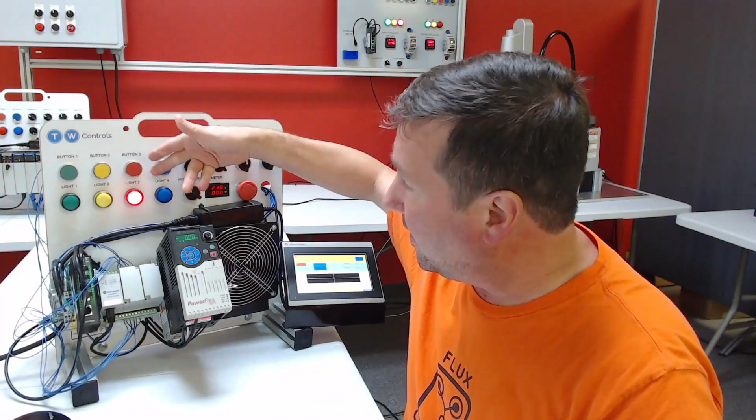Just to add a little bit of variability, pressing the red button won't make it go to the next step, but we need to press and hold it for 1 second, and then the blue light will come on. And finally, pressing the blue button will start the process all over. While this is a really simple thing we're doing here, this can easily be scaled to any machine.

And the best part about the methods we're showing here is they are compatible with all Allen Bradley PLCs. From the ControlLogix and CompactLogix for Studio 5000, formerly RSLogix 5000, to RSLogix 500 for the MicroLogix and the SLC 500, and even the Connected Components Workbench for the Micro800 PLC. Actually, these are probably compatible with most brands of PLCs because they use basic programming fundamentals.

Now, I'm not a fan of all these methods, but you will run into them out in the field. And I debated what order to put these in, and I decided to put them from the one I'm most likely to do to the one I am the least likely to do. And that doesn't mean the ones on the tail end are necessarily the worst. They're just the ones, in my opinion, that I wouldn't use to program.

In this lesson, we're going to show how to use a counter to track your machine steps. And this is actually the method I used in my very first program, which we reviewed not too long ago. Also note that this footage was extracted from a live stream, so it is not perfect.

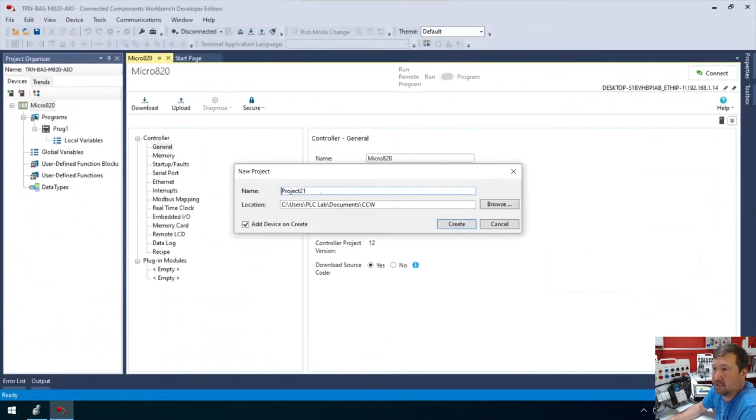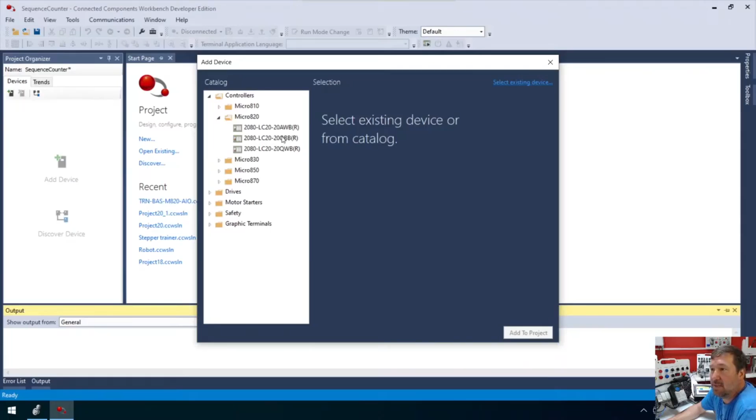And we're going to create a new program. And let's go back to our Studio 5000, and our first one is a counter type. So this is the program we're going to be making. And so I am going to just call this one Sequence Counter. And if we go to Controllers, and in this case we have a Micro820, and it's a 2080-LC20-20QBB, and we're going to select it and add to project.

So in our program, the first thing that we desperately need to always remember to do is to set up that Ethernet configuration. And if you're using one of our standard trainers, then it's going to be 192.168.1.10 with a subnet of 255.255.255.0. Now in the case of mine, since I have that one back there set up, the CompactLogix for 10, mine I'm going to set it at 14.

And then we're going to create a program. So we're going to add a new ladder diagram. And actually we're going to create two programs because we should segment ours a little bit, because that's something we definitely noticed in my first program, is that I had 300 rungs in one single routine.

So I am going to rename this one to Outputs, and I'm going to rename this one to Sequence. Now this is something that is different between Studio 5000 and the Connected Components Workbench. In this case, all programs are executed in the order that they're listed. So let's say we wanted Sequence to execute first, then we would just drag it up here. And now it's going to execute Sequence, and then it's going to execute Outputs, and then it's going to start over.

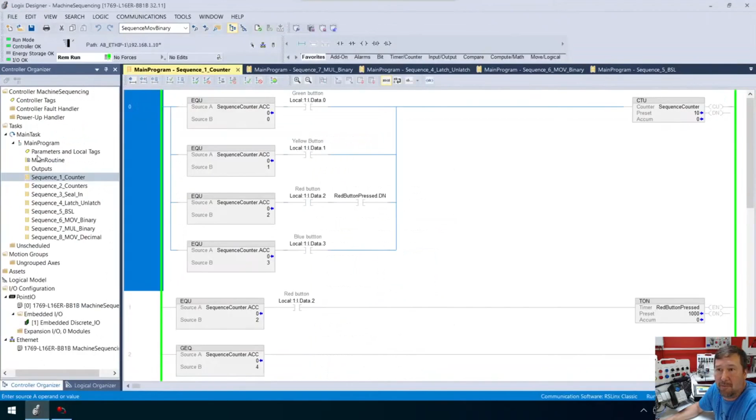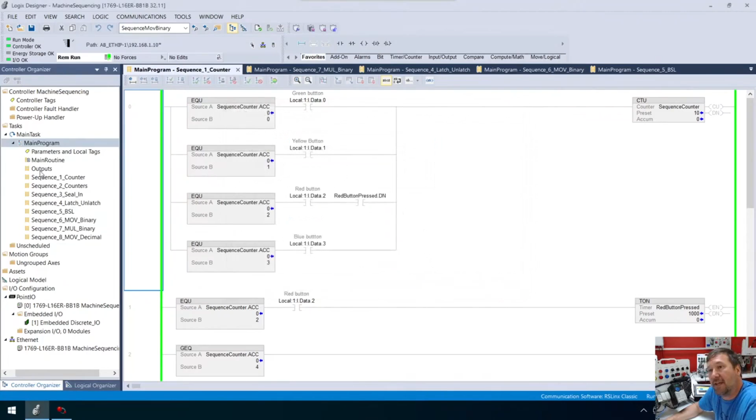Whereas in Studio 5000, we have a main routine. And if we right-click our main program and go to Properties, we can see our main routine is the main routine. So it only executes this routine right here, and then we can use the JSRs or other means to go to the other ones.

So in this case, I've done something that really you should not typically do, but I did this so that if we needed these samples, we could run them quickly. Here's my outputs, and then I have the different methods of sequencing where we can just switch them on and off as needed. But in this case, they are actually all executed.

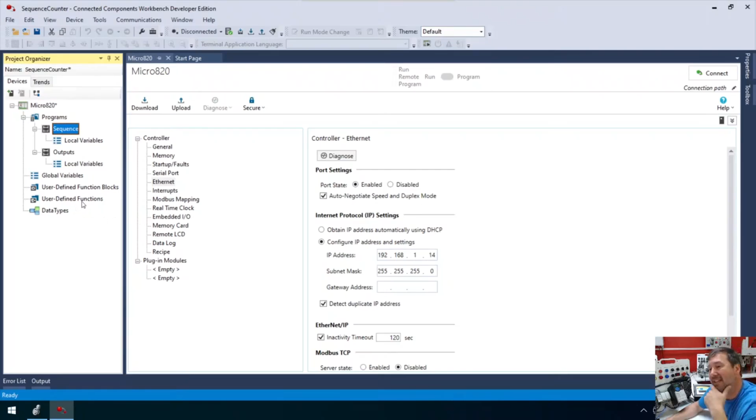And if we wanted subroutines, we'd actually use user-defined functions. And I guess I could do it that way, but no, let's stick fairly basic here. So in this case, we're going to be using a counter to run our sequencers. So we're going to open that up.

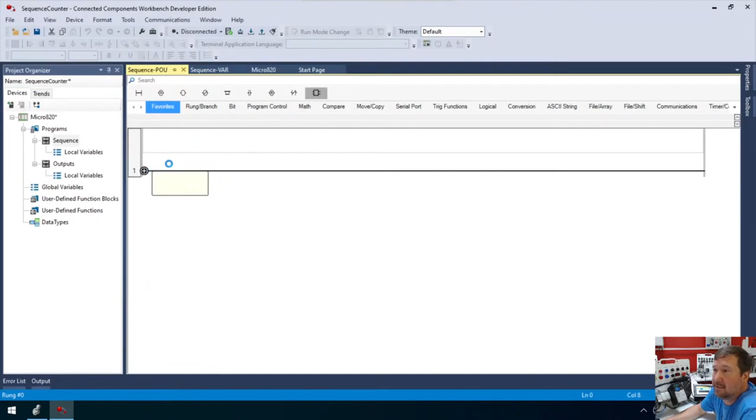Okay, and in this case, we're going to use just a really basic counter. So first I'm going to drag down an instruction block. And then if we just start typing CT, you're going to see the counters that come up. You have a count up counter, a count down counter, and then we have the up down counter. And we're going to use the CTU up counter. Let's leave this exactly as it is.

And then we're going to need some conditions to make it count. So I'm going to bring down a rung. And our first condition was that button 1 would make it index if it was in step 1, or in this case step 0. So we're going to go to our IO tab. I wish somebody explained to me why the outputs come before the inputs, but I almost always do that. And actually it's input 4. So input 4 is connected to button 1.

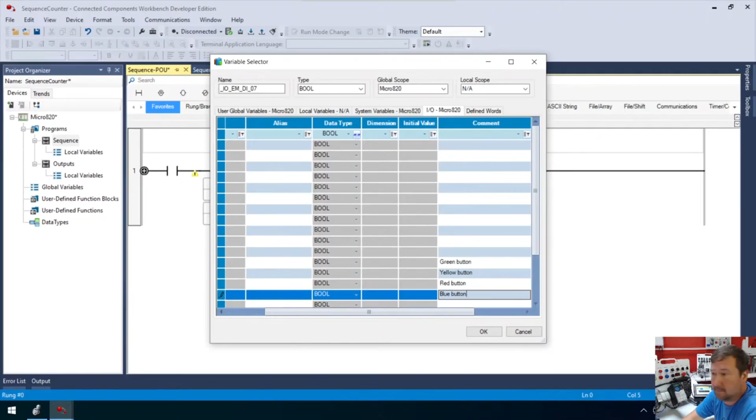In fact, let's go ahead and label these while we're here. So this is our green button. This is our yellow button. Red button, and finally our blue button. Okay, so we're going to use the green button here.

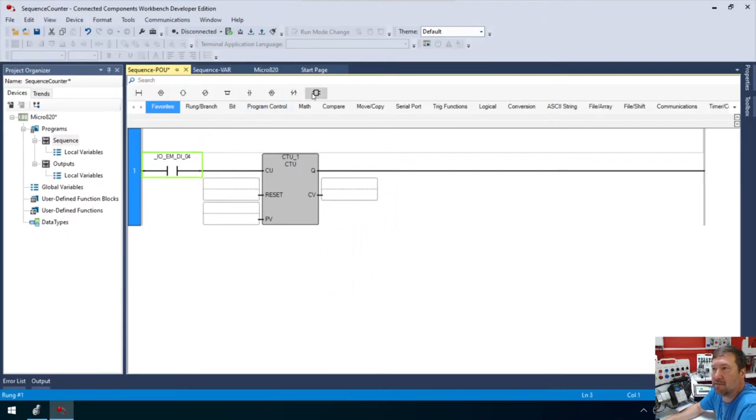Now one thing we've got to think about is what is the first step of a counter. Counters do start at step or accumulated value of 0. So we will have a step 0. There's nothing wrong with that. But we only want this button to work when we're in step 0. So we're going to bring another instruction block down in front of it. And we're going to be looking for an equal statement.

Now, we've talked about it in a few videos, because if you're in Studio 5000, you're going to want to type EQU and you're going to get nothing. And that's because right now I am in the default theme, we'll look in a second. But mainly, in this case, we've got to hunt and find the equal sign. Or I guess, can you hit equals? Yeah, we could hit the equals symbol and it would bring these up.

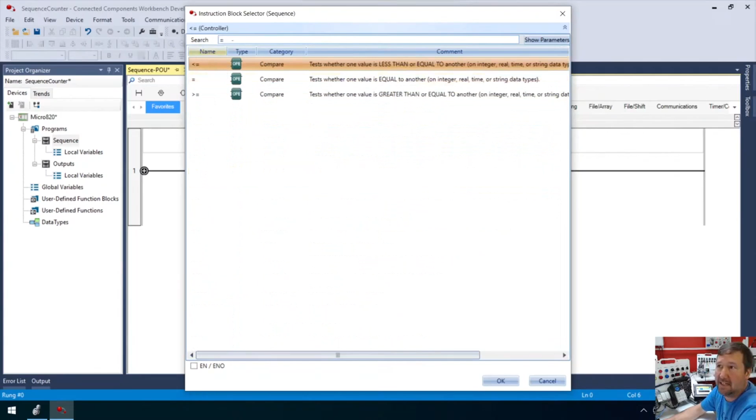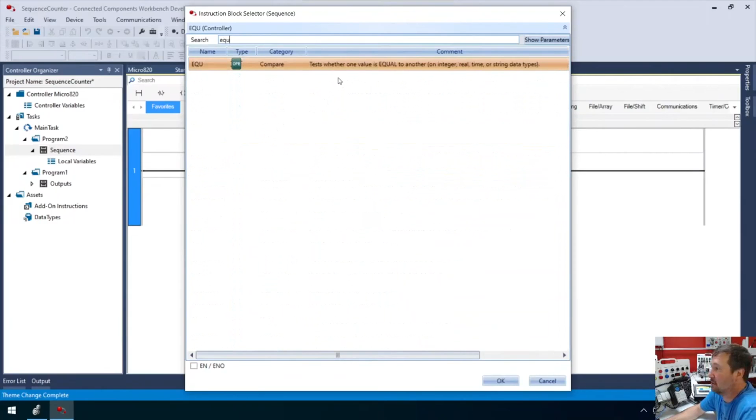Now, if you're more used to Studio 5000, the default theme up here, we're going to switch to the Logix theme. And then we'll go back in. And now if we double click on this, we can type EQU, which is what we're used to seeing in Studio 5000. And we can bring that in. All right, so now, what do we need to put here?

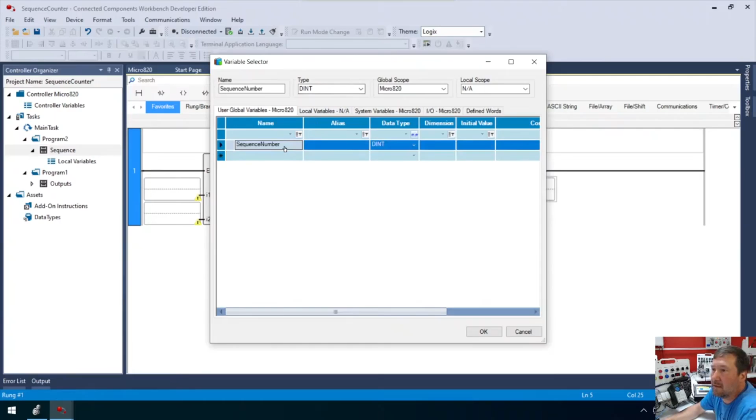Well, this is one of the differences in Connected Components Workbench: we don't really have a .ACC per se. We assign it things. So right here, I'm going to make this sequence number. So I'm going to double click here. And we're going to create a global variable called sequence. Let's see, am I going to create a new program each time? Yeah, we will. So we're just going to call this sequence number. And it will be a DINT. And so this is now going to be the accumulated value of this counter.

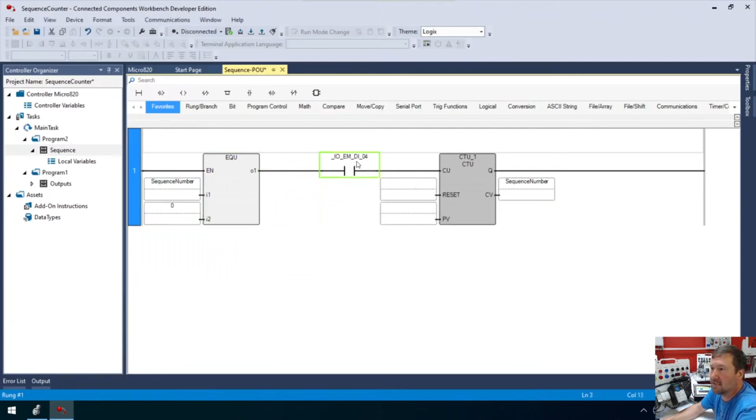So what I'm going to do now is I'm going to copy that. Let me right click that and copy. That way you can see what I did. And we're going to paste it right here. And I want to say if the sequence number is 0. And why is that not showing up as green button? Oh, it did. No, here.

So this is a little bit different. In Connected Components Workbench, I really don't know what comments exactly are for, because aliases are more of your comments or descriptions. There we go. Now we have a green button. So let me go back and take these out.

And move these over here. Yeah. Well, Rod, what were you so slow on that for? You're right. I usually do too. I just, when I was sitting here talking, I sat there and put them in the comment column.

All right, and while we're here, these are our lights. So this will be light 1. What's cool is in an alias situation, you can have spaces or anything in Connected Components. So they really do work just like, well, actually they're a good mix. Let me put these in. Light 2, light 3, light 4. All right, and mainly here we want the green button.

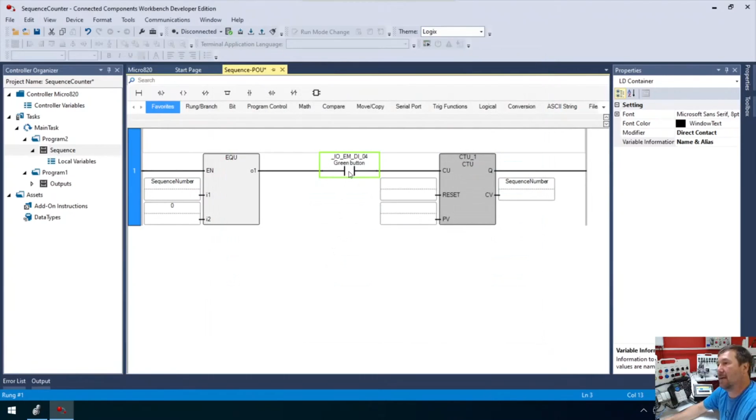What's cool about this is, let's just copy and paste that real quick, is I can type in _IO and I could go through all that and find that. But in this case, I can type yellow light. Yellow button. And there it is. So the alias is, in this case, it is kind of an alias because you can type them in, whereas descriptions in Studio 5000, you can't.

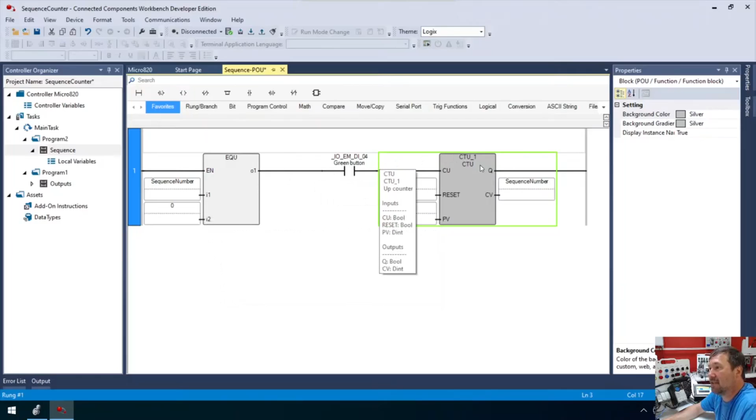So in this case, if our sequence number is 0 and we press the green button, then we're going to count up our counter. So that takes care of getting us through the first step. And now we're going to put a branch in the right place. And then we're going to copy, oh, that's right. Drag that there, drag this there. And then we're going to copy this equals down here. And actually we can just copy this green button down here as well.

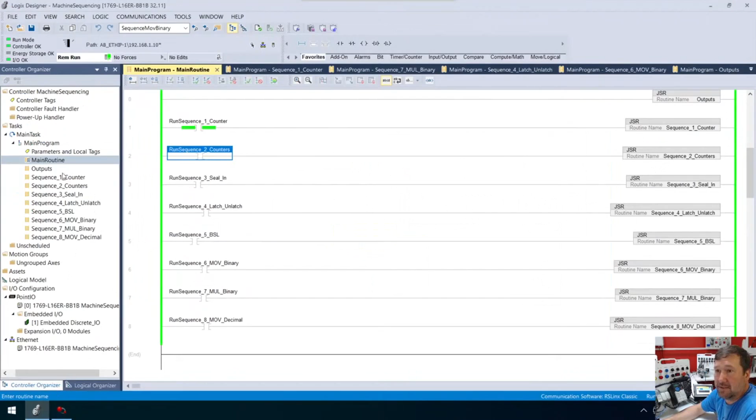Drag it over. And in this case, now if we're in sequence number 1 and we press the yellow button, then we want it to count. Because that's what I said, right? Let's go back to our Studio 5000. Let me make sure, yeah, counter, yellow button. Okay, now in this case, the red button, we want to have to hold it for 1 second before it goes on. I just thought it would be nice to add a little something to it.

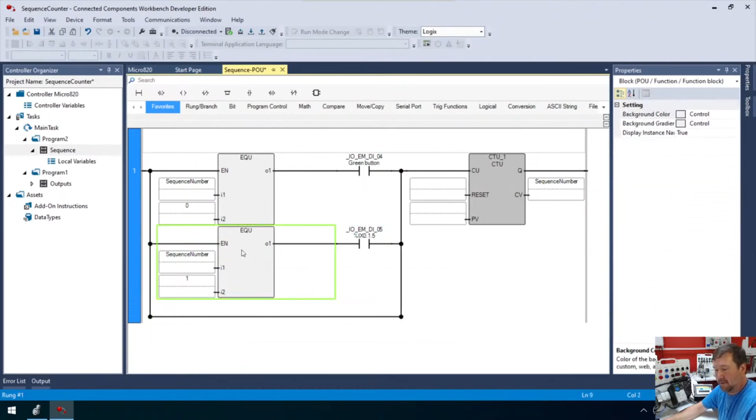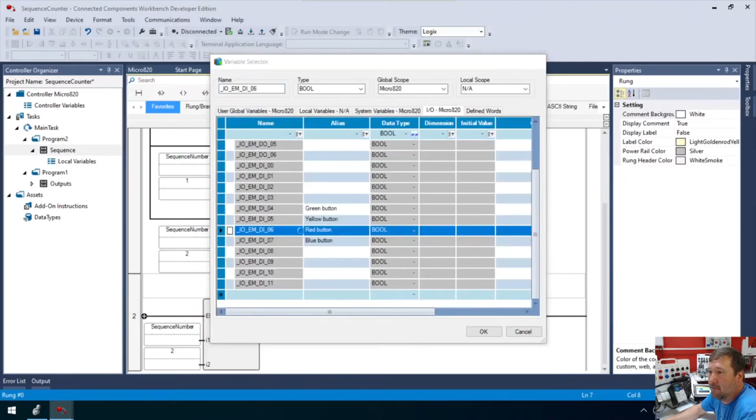So we're going to add another branch. And then we'll copy the equals. So in this case, though, we want a timer here. Now, in this case, I would probably put it on an additional rung. So if our sequence equals 2, and we have the red button, and now we want a timer. So we are just going to use a TON. Now if you're in the Logix theme, you can type TON.

And this is kind of one of the cool things about Connected Components Workbench, the way they use timers. One, I could put a variable in here, or I can simply put T#1S, and that's going to be a 1 second timer. I could also put in T#1000MS, and that would be the exact same 1 second timer. So I really do like the way they do the timers. And then up here, we're going to look for the Q bit in this case. The Q bit is very similar to the done bit.

So TON, Q bit. Now here's something I see done often, I was waiting for the right spot. First, I can add a description to this. So I could make this a little more descriptive, because right now, what is TON_1.Q? It's not really clear. A lot of people don't know it defaults to these names, but you can change them. So if I double click right here, right there is the instance name. So I can put red button delay.

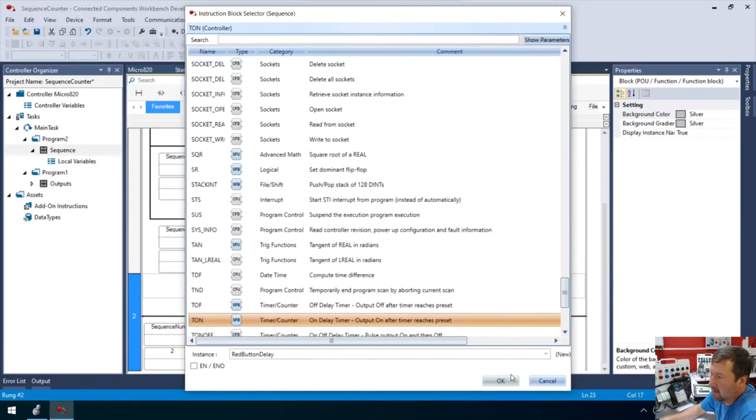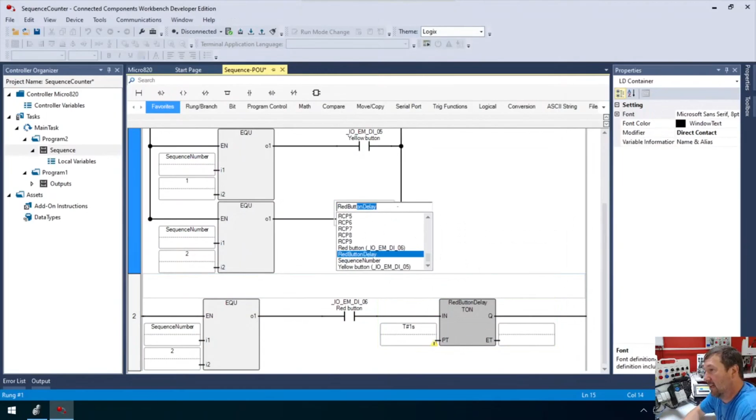Okay. And one thing I don't like is it doesn't automatically change it here. Now we've got to go and type red button delay. Oops, didn't get it right. Red button delay .Q. Where am I? Why do I have a triangle here? Does anybody know? What am I missing? T#1S. That sure looks right. Let me just hit the build button on this. What is that? Maybe I'm missing something.

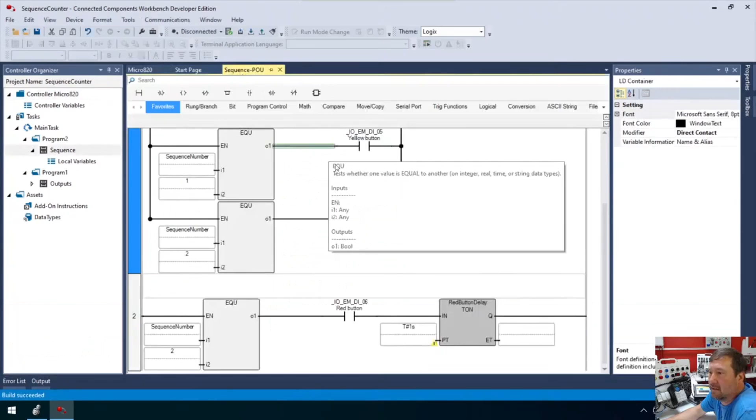Oh no, everything's fine. I'm not sure why it's showing a triangle here. Referring to undefined variable. Well, no. Yeah, it is an undefined variable because we just wrote that out. So, okay, maybe they'll come back to haunt us.

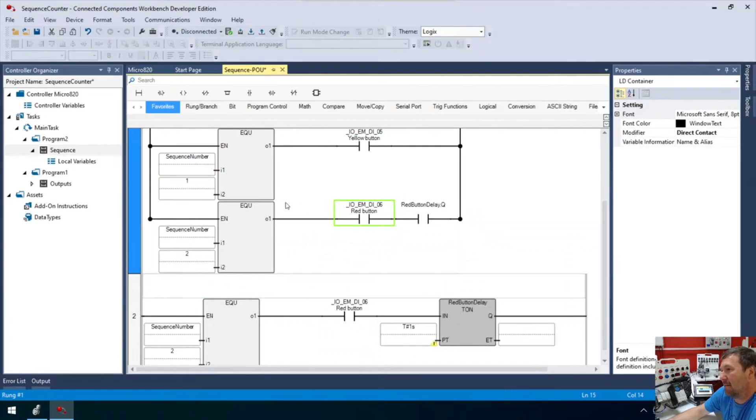I'm not sure. Now, here's one thing I would do here is, while this will work functionally fine, I actually probably would add this red button right here. Just for clarity. I don't know. I could go either way on that. This does nothing, has zero functionality because obviously the red button needs to be true for this timer to start. But if I was looking at it troubleshooting and I'm looking for an input, it might make it a little clearer that the red button's what I'm waiting on instead of having to chase this down. But okay, so that takes care of that one.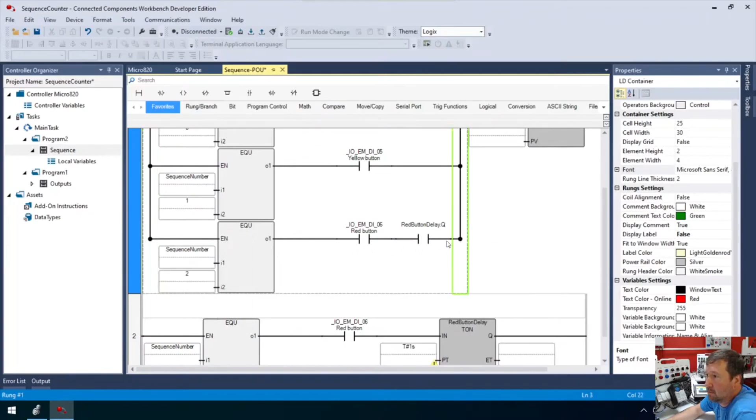And then finally, we're going to have a blue one. So we're going to add another branch. Oops, come on now. Why can I not? There we go. Below. And we're going to copy the equals one more time. And this time we're going to be looking for 3. And actually, yeah, we are going to do it this way. And this time we'll look for the blue button. All right, so that takes care of that.

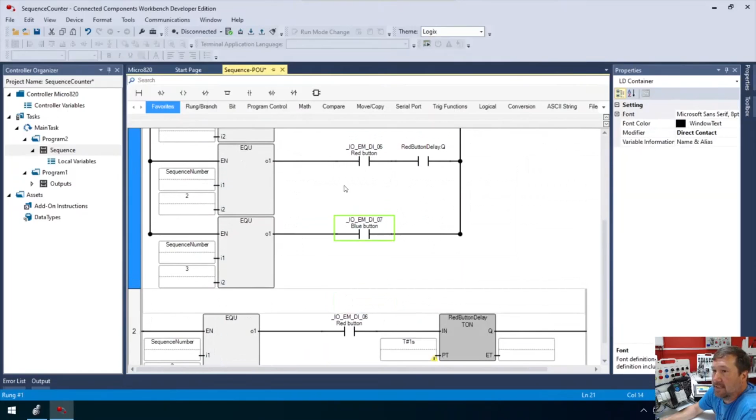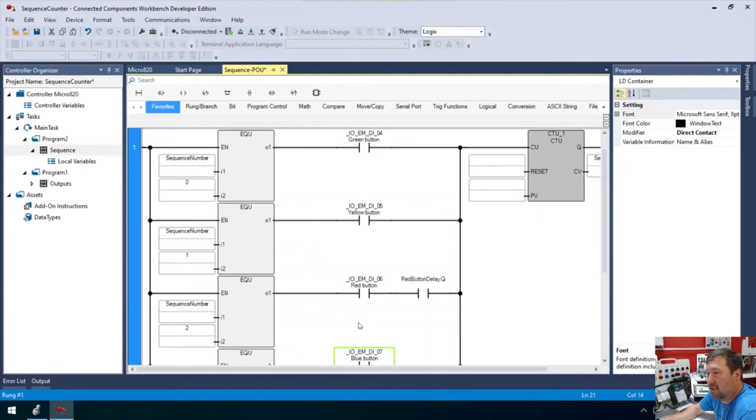And now what we need to do, so that is going to index through these. In fact, yeah, let's go ahead and finish our outputs and then talk about how this works. So basically, if we're in sequence 0, I want the green light to be on. 1, I want the yellow light to be on. 2, I want the red light to be on. I think I got one of those off. Green, yellow, red, and blue. So those are what we'll want. So I'm going to go down here to this output one.

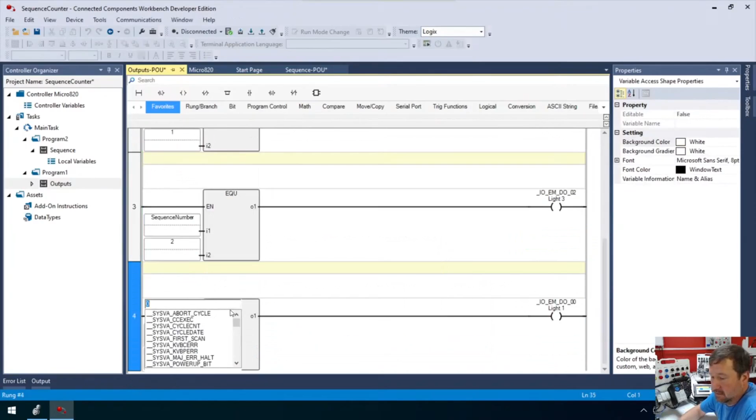And if the sequence number equals 0, we're going to output light number 1. All right, we should be able to just copy and paste that. And so in this case, if it's number 1, then we're going to go to light 2. And if we go to number 2, light 3, and finally 3, light number 4. Okay, now this is partially going to work, but let's go ahead and download this and talk about exactly what's going on here.

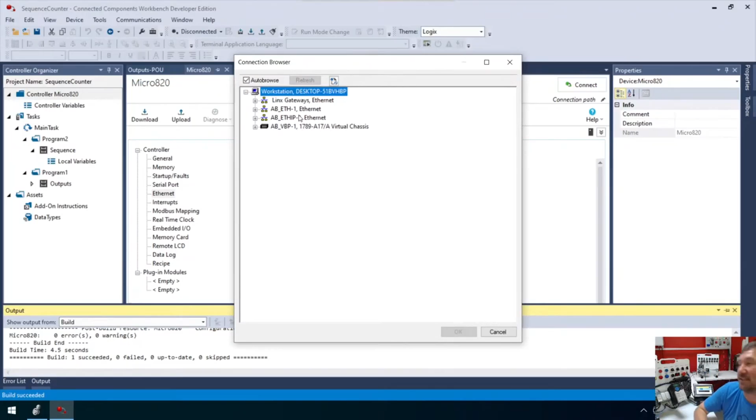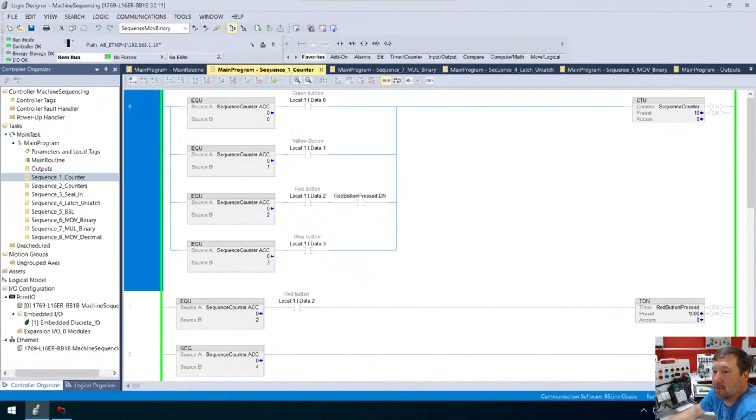We have a green light on now. So if this is right, when I press the green light, we should get the yellow light on. And okay. Looks like we have a learning opportunity because it does not work. So let's go into our program and figure out what is going on. And let's see, sequence, oops, well, let's get back over here. All right, all that looks right. Come over here and we press the green light.

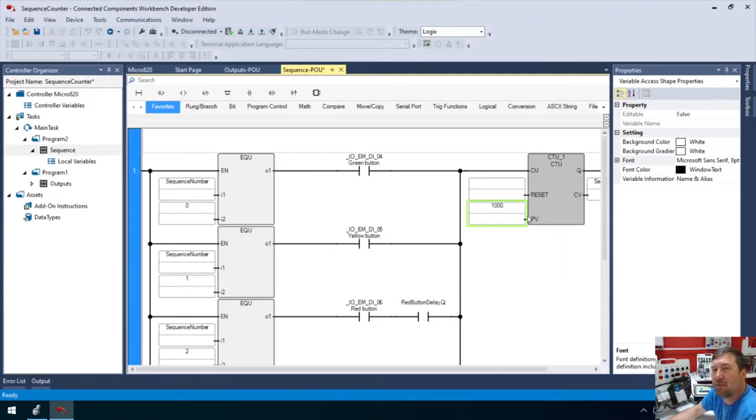It's true. So I did not put in a preset right here, so yeah, let me just go offline. And I'm not gonna worry about figuring out the exact step. In fact, I'm just gonna put 100 in here. That's fine, I'll put 1,000 in there. That's because we're gonna reset it externally. In fact, that's why I wanted to download this so we could see some options on that. So download this again, pop over here, and I hit the green button. All right, now the yellow light illuminates.

So now if I hit the yellow one, the red should illuminate. Now the red button, if I hit it, is not going to illuminate. So we can sit here and hit this and it's not going to happen because we have that timer on there. So I hit it for 1 second and we're going to get the green. Now when I hit the green button, you're going to see the green light go out.

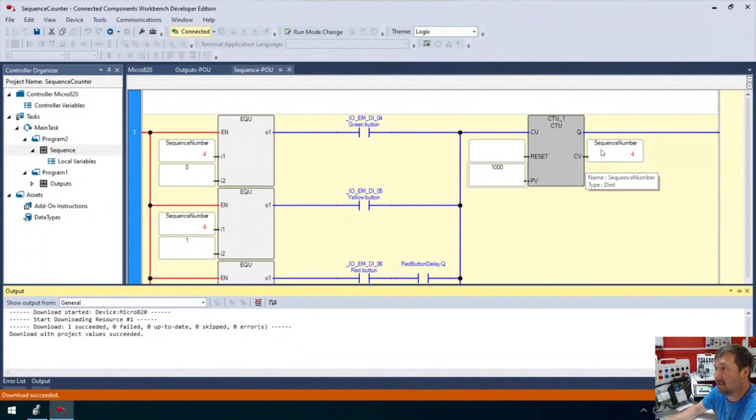And that's the next thing we need to work on is now, if we go over to our program, we are in sequence number 4. Well, we only had steps 0 through 3. So 4 is not an actual sequence number. So at this point, if you were actually on a machine, you could either cycle stop it so that maybe an operator has to walk back up and do it again. Or in my case, I'm going to make it start all over. So I'm going to go offline here. And I am going to add another rung.

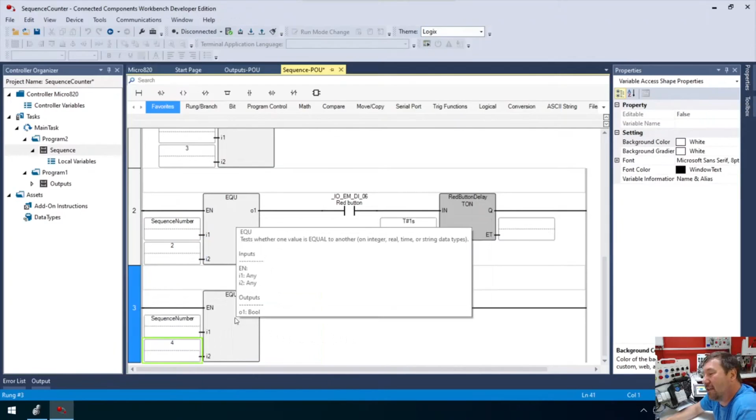And then we are going to put this equal statement. So I'm just going to right click, copy it, and I'm going to paste it here in rung 3. And if it equals 4, actually, while I don't believe there's any way it could happen, this shouldn't be an equal statement. This should be a greater than or equal, so a GEQ. Now, it should never be able to get above it, but that's a good thing to do, I think. I can't think of why you wouldn't want to do that right now.

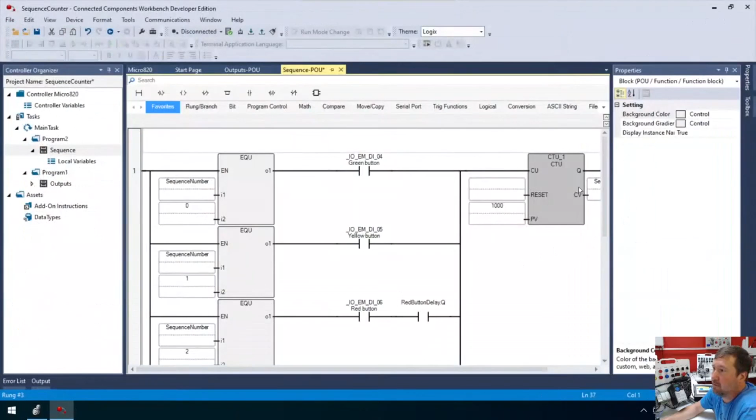And so when it is, we are going to reset that counter. Now, resets work differently in Connected Components Workbench. If we were in Studio 5000, then we could simply use an RES instruction right here and reset our counter. But in Connected Components Workbench, the reset is actually part of the base instruction. So in this case, we're going to need a tag here for this. I'm going to call this reset sequence. Oops, so I got to create that.

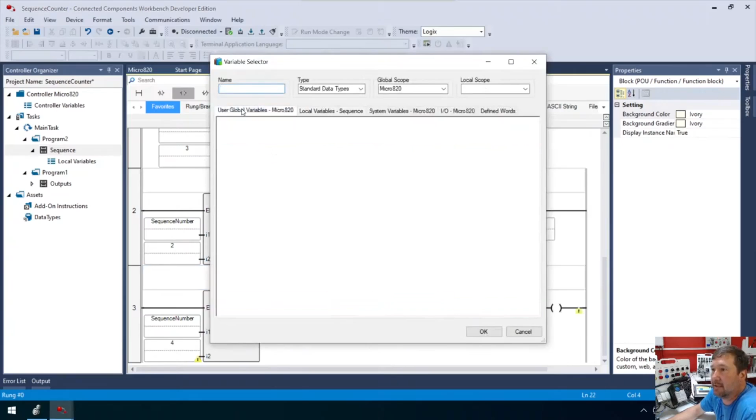And now I can take that same reset sequence, copy it, and then right here we're going to use an output energize to that reset sequence. And we can take this out. And so let's download that.

All right, so now it's showing a green light. I press the green button. We go to a yellow light. I press the yellow button. We go to a red light. I press the red button. Whoops, I got to press it for 1 second now. So I press and hold that. We get a blue light. And then finally, when I press the green button now, it's going to go back to green. And we can sit here and do this all we want.

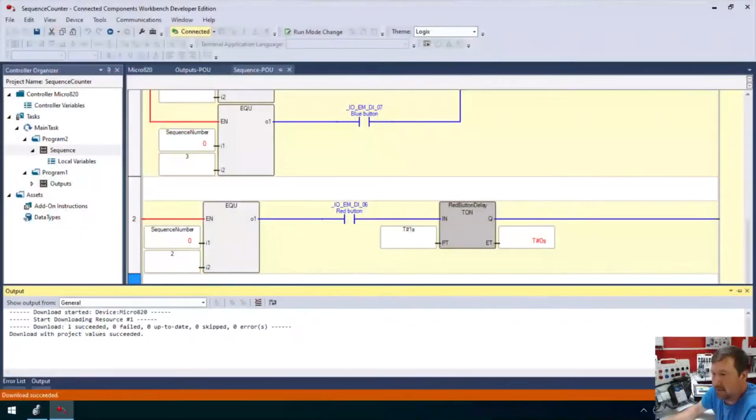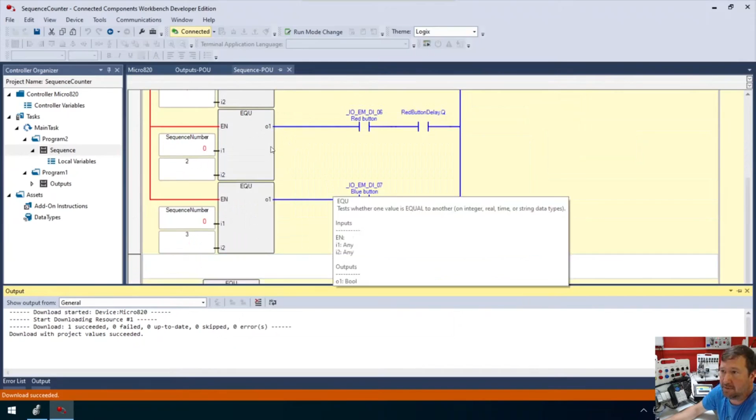All right. And so now, let's look at this in the program, make sure we understand exactly what's going on. So we have a counter here, and these are the conditions that we will count up with. So right now, sequence number has to equal 0. In this case, sequence number is equal to 0, and we can see that because it's red on the left side of it. This case, it would need to be 1. This case, it would need to be 2 and 3. So these 3 lower branches are all false.

This is the only true branch we have, so we press the green button, and you never actually see it go true there, do you? You saw that really this turned red, and all of a sudden this was blue. Well, that's because for that one split, maybe 2-3 millisecond scan, I'm not even sure what the scanning time of this is, that was true. But our PC is not going to update that fast.

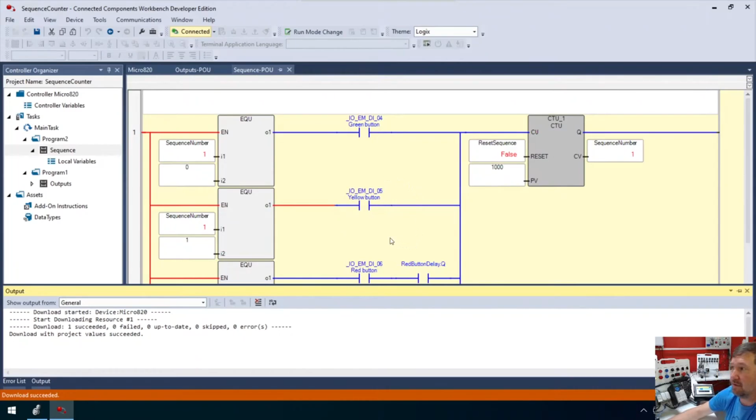So now we're in step 1. We can see that by the red here, and it's going to look for the yellow to be true. So this sequence number here is the same as this sequence number here, here, here, and here. They're all the same tag. So we press the yellow button, and that shifts it down to here. Now here, if I can do it quick enough, you can see the red button indicating, but since I'm not holding it for a full second, it's never going to go through because it's waiting on that delay.

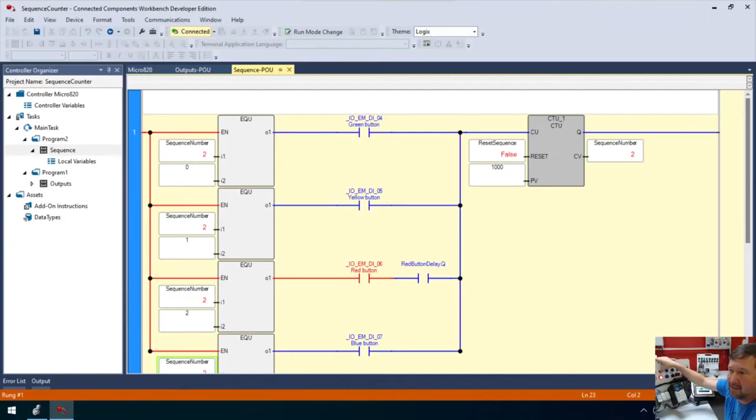So we're going to hold that, and now it shifts to the next one, and it's looking for the blue, and we go back to the beginning. And this is pretty much what we saw in my first RSLogix 500 program, me sequencing this way. So I hope this video has been helpful.